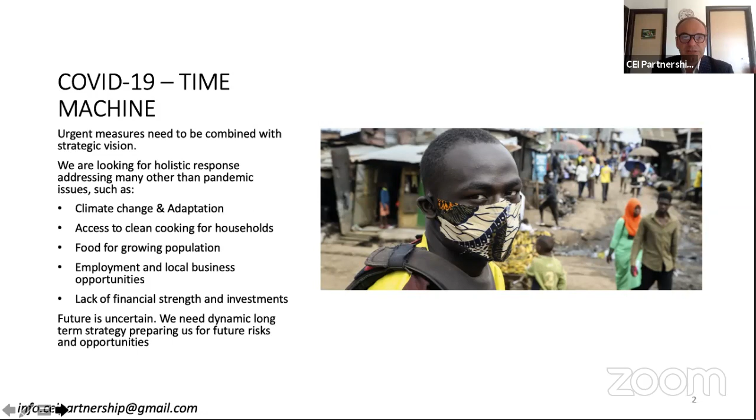So we now need to combine our short-term measures with strategic vision, and we should tackle at the same time also climate change and adaptation, access to clean cooking for households, food for growing population in Africa. We need to arrange now already employment and local business opportunities for people in rural areas and in the cities. Also, of course, we need to address a lot of financial investment resources for energy and other projects.

There is a tool for decision making to make decisions under uncertainty, to build strategic tools which we are applying. It's called real option analysis, where we're preparing for future decisions now already, so that management and decision makers can actually act efficiently when we see some new opportunities in the future, or if we face some difficulties.

But following this approach, let's start with diagnostic, which we already done more or less. Yes, availability of electric power is extremely low in Africa, and we need to do something with this. It's not about transition, it's about development. We need to increase energy production by at least 3 to 5 times within very short time, just to catch up with social and economic development.

Also, another important issue is availability of fertilizers and productivity of land. Because if our land is not used efficiently, then we don't have enough food, we don't have enough security, and we also have to cut our trees, which creates additional problems, which already was mentioned today.

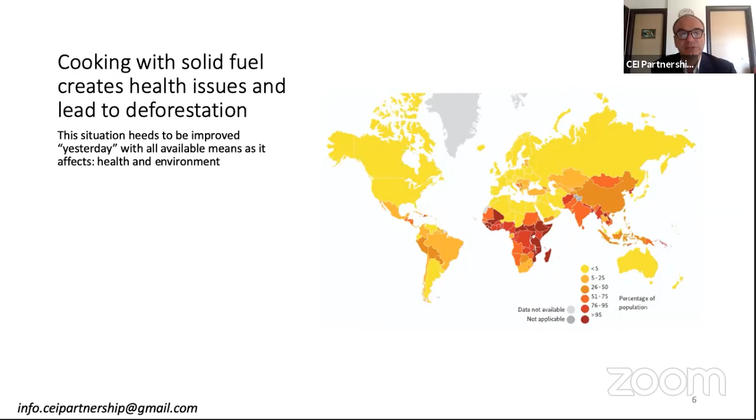Deforestation creates big problems for everyone, and not only in Africa, actually, because rainforest in Africa and in South America is a carbon sink, which I think the whole world is interested in supporting.

And of course, most importantly, we already know that population will be growing, and already today we have to prepare rural areas, we have to prepare cities to accommodate, to feed, and to provide human development to a much larger number of people. And all of this we have to do now.

As was just mentioned by Mr. Ado, Africa is very vulnerable to climate change and actually probably pays the highest price for changing climate. It includes deforestation, it includes coastal erosion, it includes other negative consequences for entire population. At the same time, Africa is far from being the greatest emitter of carbon into atmosphere. The share of Africa is actually very insignificant.

At the same time, as I just mentioned, rainforests are actually one of the key carbon sinks, and Africa is one of the 2 continents where rainforests still exist, and we have to protect them.

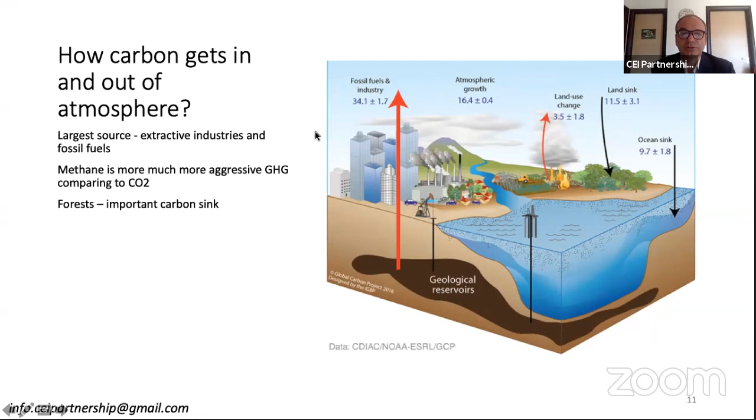Natural gas is quite available in Africa. A lot of development projects, but what we can see is that most of these projects were actually aimed at exporting natural gas or LNG, and using natural gas within the countries is actually not very active, and it should be improved and increased.

Because when we use this product for domestic purposes, we also switch on some microeconomic multiplication, so that we have more salaries, we have better conditions for living for people, and as a result, actually, using this gas, we can turn around the whole continent and leapfrog in many directions.

Also, as everyone knows, there is already now overproduction of LNG, and actually it's getting even worse with COVID-19. Prices are going down, so even larger companies were actually also interested in additional consumers, in access to customers. Most of them are not connected currently by pipelines, and raising finance to build new pipeline now is kind of complicated because of economic downturn.

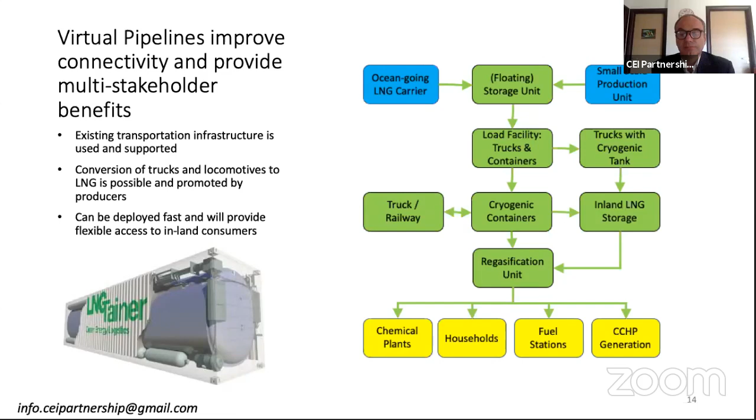Virtual pipelines have many advantages, and some of these are becoming even more important in this complicated situation. For instance, the size of projects is different. It's not always huge, so projects can be implemented one by one, and raising finance is much easier compared to raising finance for trunk pipelines.

Very fast implementation of virtual pipeline projects is also important now when we need quick measures. So I would just like to draw your attention to this technology, which can really help solve a lot of issues on the continent.

I think everybody is saying now that natural gas is a bridge to renewables, but we need to understand how to cross this bridge. With use of natural gas, we can already reduce emissions while ramping up production of electric energy. We can also create infrastructure much more suitable for renewable energy than a centralized grid system. And as we will see later, virtual pipelines can also be used to process waste and convert it into energy and some neutral or useful substances.

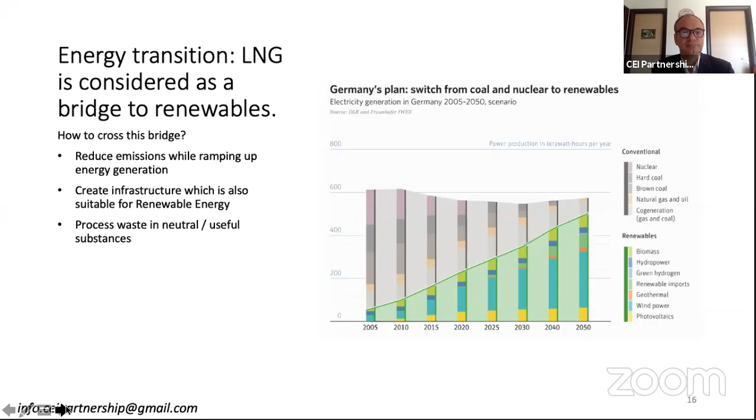First of all, with natural gas it's possible to use combined cycle generation, which increases efficiency of electric power generation. Normally with biomass, efficiency is in the range of 15, 20 to 25%. With combined cycle generation, which combines gas turbine and steam turbine, efficiency can be even above 60%. So we can get much more electric power from the same volume of fuel.

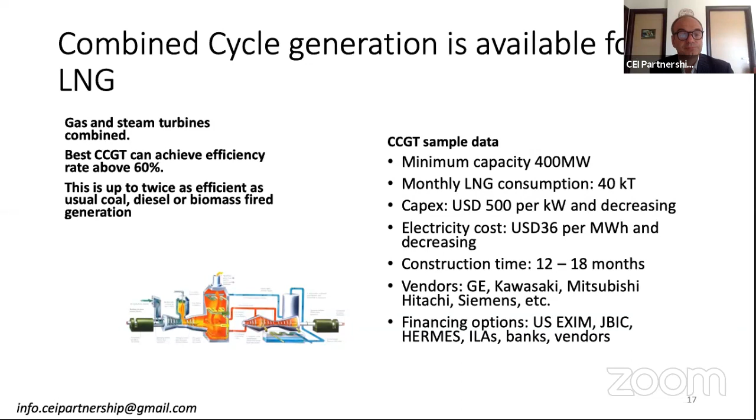Also, combined cycle gas turbines can now generate the cheapest electric power, making electricity affordable. But of course, combined cycle generation is more suitable for larger projects, and larger projects are usually more expensive and still require power transmission.

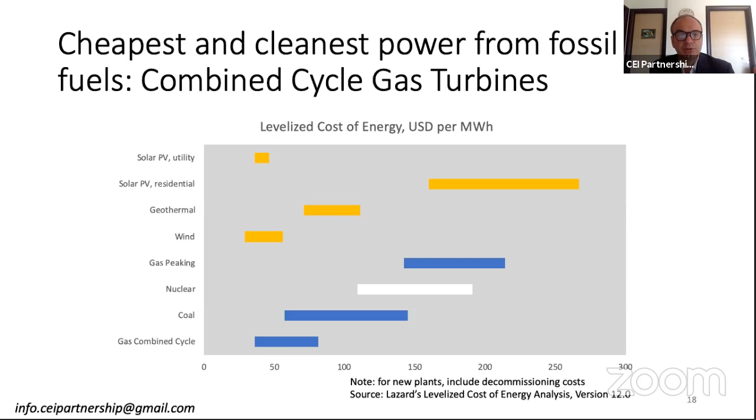But we can further increase efficiency if, in addition to a centralized power station, we design combined cooling, heat and power generation decentralized networks. In this case, we're not just using electric power, but also using heat efficiently, and this heat we can also convert into cooling. Of course, heat and cooling cannot be transported over longer distances, so it has to be decentralized.

But providing cooling and heat for everyone, especially in rural areas, is good not just for healthcare, as mentioned previously today, but available cooling in rural areas also opens a lot of new business models for farmers and food processing, because with cooling we can preserve things, keep them longer, accumulate and transship, increasing access to markets. So with proliferation of decentralized combined cooling, heat and power generation, we can really change the game, especially in many rural areas inside the continent.

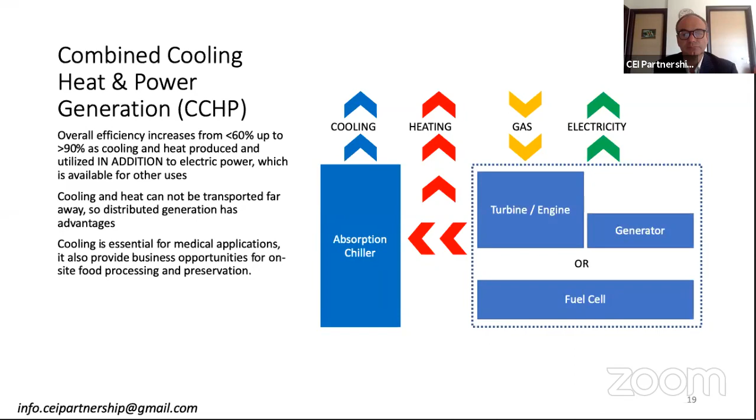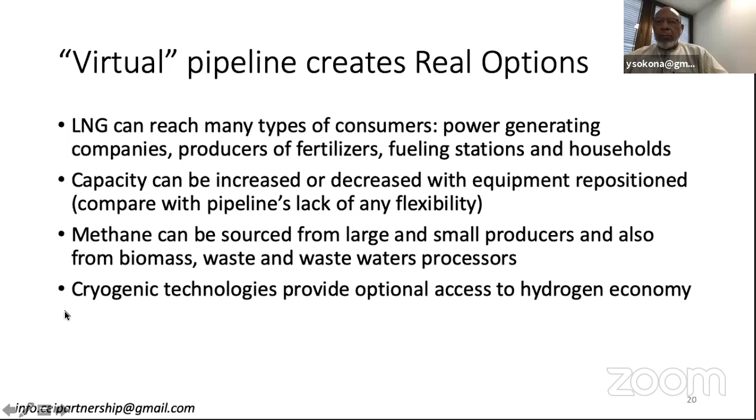Also, virtual pipelines create real options for the future, which we can use if it's profitable, or just drop if it doesn't work. I'll bring three examples. One is access to small-scale producers of gas.

As everyone knows, methane is a much more aggressive greenhouse gas compared to carbon dioxide. That's why we see flaring of accompanying gas everywhere, because its volumes are too small to build pipelines but too big to just emit to atmosphere. With virtual pipeline equipment, we can actually liquefy this gas, put it into our system and use it efficiently. As a result, we're not losing this energy, we're not polluting the atmosphere with methane, and we also provide an additional income stream for oil producing companies.

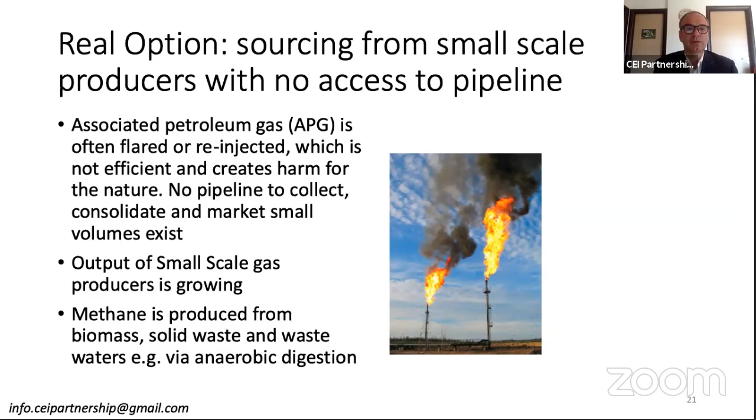Second option is biomass and waste management. Anaerobic digestion is a well-known technology, but unfortunately in some countries it's not used as much as it should be. With anaerobic digestion, we can extract methane from wastewaters and waste, and this methane can also be consolidated and transported with a virtual pipeline to our consumers. This will also help solve the waste problem of big cities. Actually, for anaerobic digestion, it's not even that important to sort waste, because co-digestion is sometimes even more efficient than digestion of a single type of waste.

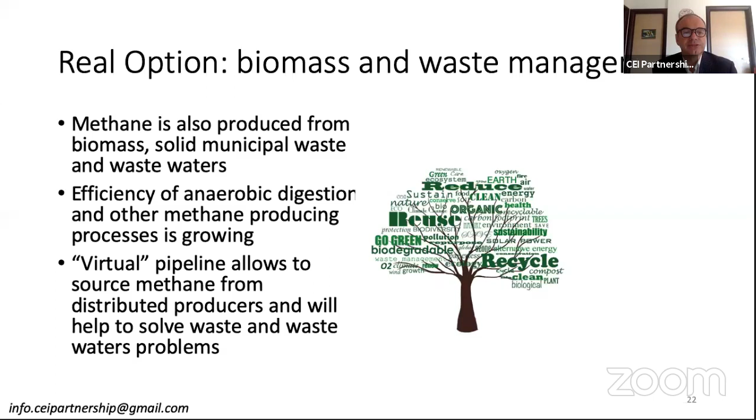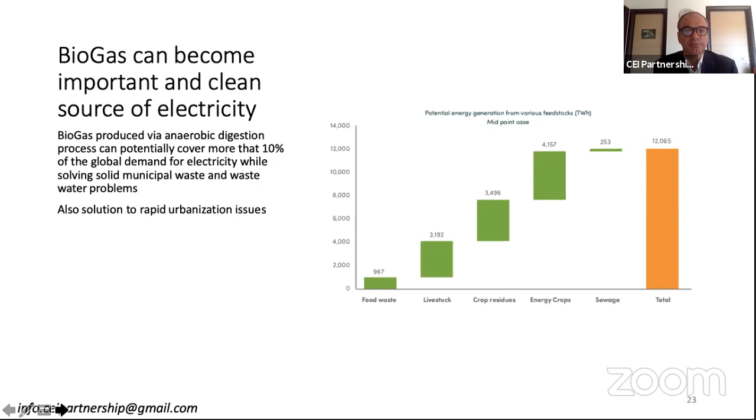It can also be used to process wastewaters without drying and spending energy to dry wet waste or wastewaters. And biogas, as I said, is becoming a more and more important source of electricity. There are estimates that up to 10% of global demand for electricity can be satisfied with biogas, solving the waste problem in parallel. The third real option is hydrogen.

Hydrogen currently is too expensive to produce. Also, the efficiency of this conversion, like hydrogen into electric power, is also not very good.

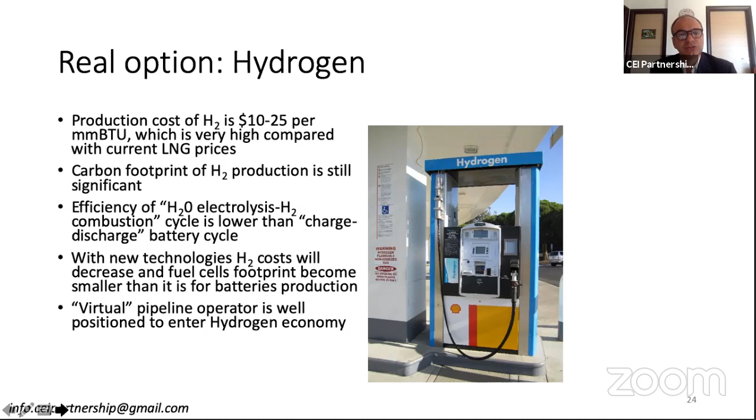Because electrolysis has efficiency of say 60%, then combustion of hydrogen has the same 60%. As a result, it's much less efficient than a battery charge-discharge cycle. But technologies are being developed, and with combined generation, hydrogen can become actually a fuel of choice. This also requires cryogenic technologies, which will be developed through implementation of virtual pipelines.

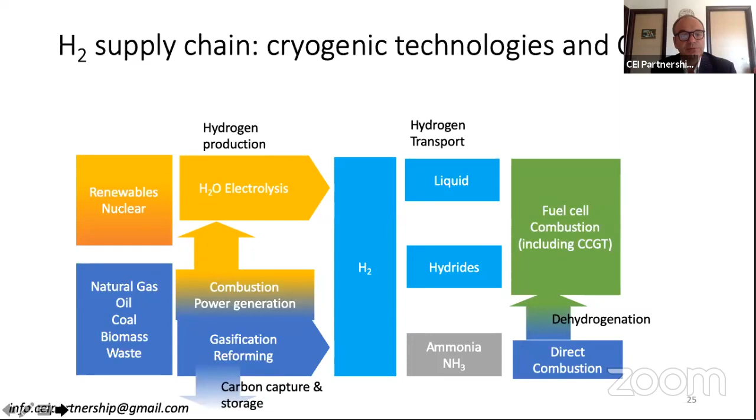So in the future, when and if hydrogen becomes efficient, our technologies which we develop for methane with virtual pipelines will be well used. Also, as I said, there are more opportunities which can be achieved through using virtual pipelines.

This is, for instance, production of fertilizers, and transportation of LNG to areas where pipelines are still not existent because of lack of finance or because of not solved right-of-way issues or something else. Also, what is good about virtual pipelines is using the same roads and railroads. So the money which is paid for transportation is not paid to pipeline companies located far away, but to operators of roads and railroads locally.

So at the same time, we are providing electricity, we are providing energy, and we are improving or supporting our roads and railroads, which can be used for all sorts of other uses, for other businesses, for other cargo, for passengers. So virtual pipelines provide benefits for communities. This is a really big difference with trunk networks or trunk pipelines.

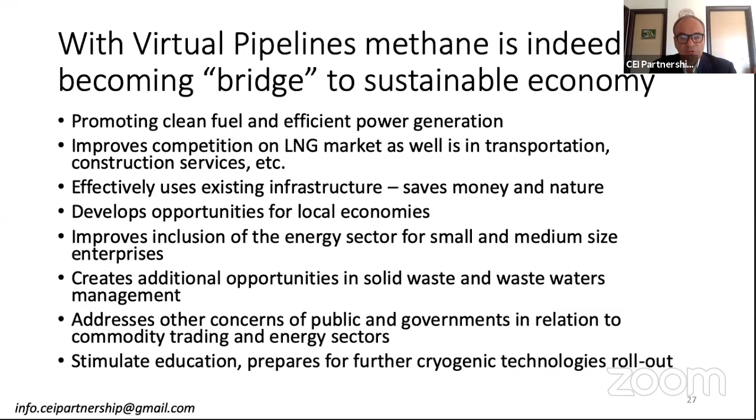In this sense, with virtual pipelines, natural gas or methane is really becoming a bridge to sustainable economy. Because if you implement widely this virtual pipeline system, we build in parallel with cogeneration equipment, we build decentralized networks, which are very suitable for renewable energy. As a result, we can at some point stop reducing extracting hydrocarbons from the ground, but we can only use methane extracted from waste, plus gradually we can move to hydrogen.

To start with projects, basically there are certain steps which we already designed. First, of course, we need to agree with all stakeholders on project selection criteria. Then we start screening, selecting, and prioritization of project opportunities in Africa, review stakeholders' interests and engage stakeholders, fine-tune our business models for each specific case, which is doable for virtual pipeline. And then we basically can follow the standard route of any EPC projects.

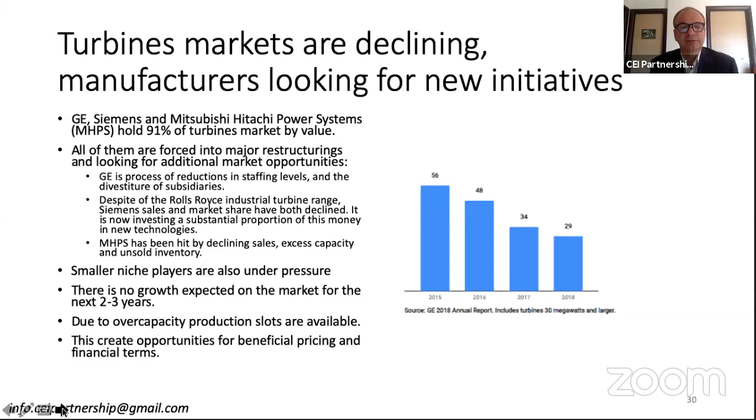Raising finance opportunities for these projects are also multiple. This includes, of course, as I mentioned, ECA export credit agencies, also international lending agencies. Potentially, there is potential for public-private partnership and for new instruments such as bonds and green bonds. And as we just discussed previously, this potential carbon pricing mechanism should also result in some funds for virtual pipeline projects.

To be successful in implementation of virtual pipelines, it's important to have innovative culture, understanding of commodity markets. Also, it's important to understand future technology trends. It's important to have scale, so we have many smaller projects, but we have to do several projects simultaneously. And it's important to have global reach, project management expertise, and financial and human resources.

So this is basically all my short speech. I just wanted to draw your attention to virtual pipelines and how these can be used not just to provide energy, but to build infrastructure suitable for renewable energy in the future, and why implementation of virtual pipelines is doable now. Thank you for your attention.